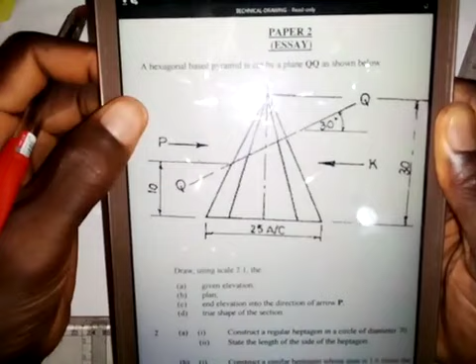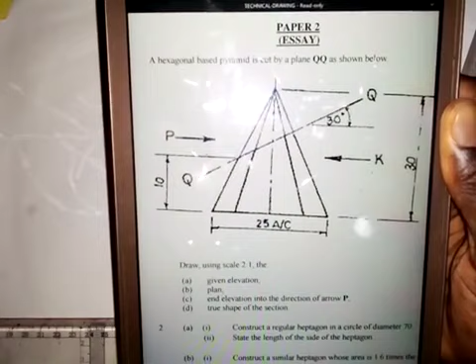And it's very important that you practice this subject because it's a practical subject. When you practice it, you become a master at it.

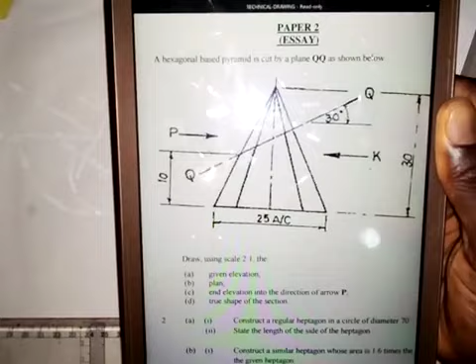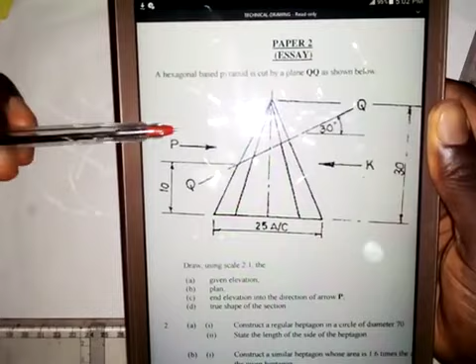I came across this question somewhere and I want to provide a solution to this question. Though I've seen something similar to this, I found that this question is a little bit different from what we have done before, in the sense that we are asked to draw using a scale of 2:1. So I'm going to explain that, but let's look at what the question says with this diagram and know what we have to do with it.

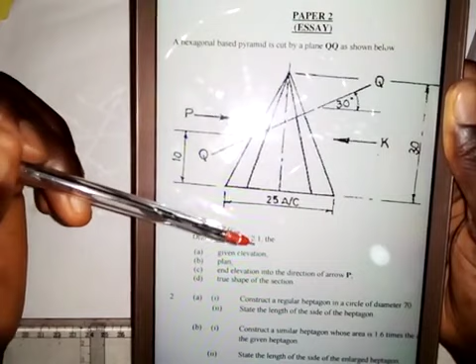As we have here, a hexagonal based pyramid is cut by a plane QQ as shown below. Draw using scale 2:1 the given elevation, the plan, the end elevation in direction of P, and the true shape of the section. So that is what we are asked to do. We have 4 questions, and I'm going to do everything in this same video.

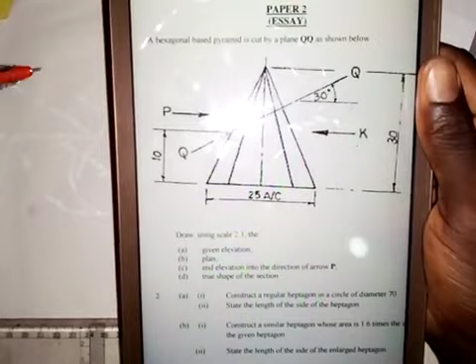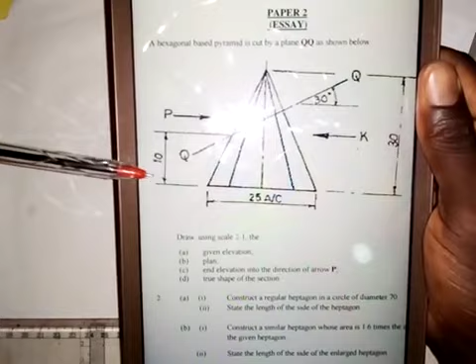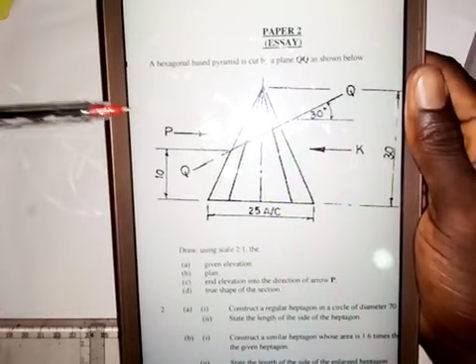Now, we're asked to use a scale of 2:1. The distance across corners here is 25 multiplied by 2, that's 50, and the distance from here to here is 10 multiplied by 2, that is 20, and the height of the pyramid is 30 multiplied by 2, that's 60, but the angle remains 30 degrees. You are not to multiply that by 2, so just leave it as 30 degrees as given in the question. So let's see the first thing that we have to do.

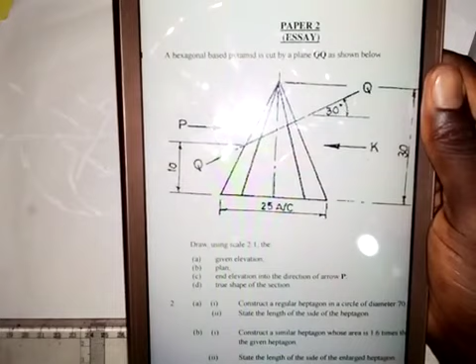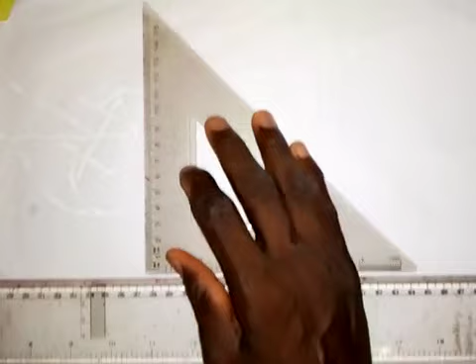We're asked to draw the given elevation, and then we have to draw the plan. So the first thing to do is to draw a vertical center line like this. Let me just extend it down a bit. All right, then we draw a horizontal center line like this.

If we multiply the distance across corners given to us, which is 25 millimeters, by 2, that will give us 50 millimeters. So we are still going to take a measurement of 25, because that distance across corners is for the diameter of the circle that we use to construct the hexagon. So the radius will be 25. We take a measurement of 25 millimeters and we draw a circle like this.

With that circle that we have drawn, we are going to put the pinpoint of the compass here. We draw an arc up here and down here, and then we put it at this point on the horizontal center line and make an arc here. So we have 6 points on this.

We are going to join these 2 points together like this. Then we join these 2 points together, and these 2 points together. So these points, we join them together. So here we have the hexagon.

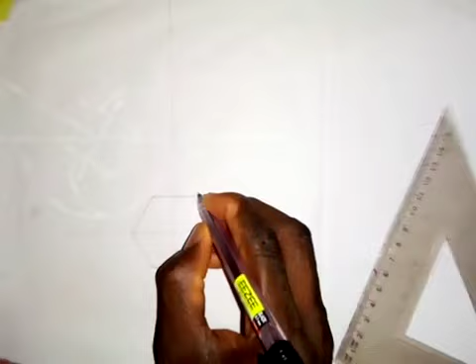Then we are going to number these points. This is point 1, this is point 2, this is point 3, this is point 4, this is point 5, this is point 6. So those are the 6 corners of the hexagon.

We are going to join these 2 points together. So 4 and 1 will be joined together like this, and then we also connect 3 and 6 together as we have connected 1 and 4 together. So we connect 3 and 6 together like this.

Okay, so having done that, the next thing that we are going to do is to draw the elevation as we are instructed in the question. So we move our T-square up and we draw a horizontal line like this. Then the next thing to do is to project this point.

So this point, I will take it up, that is point 2, and points 1 and 3 are the same point on the circumference of the circle. So we project it. Points 4 and 6 are the same point on the circumference of the circle. So we draw this, and then point 5. So we also draw a vertical line to meet the horizontal line.

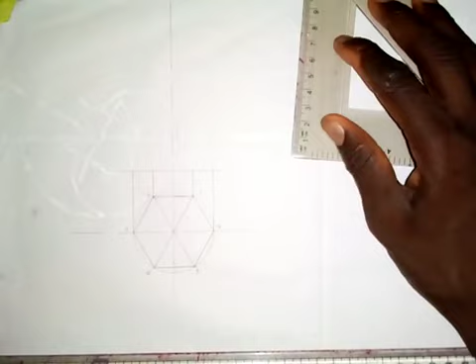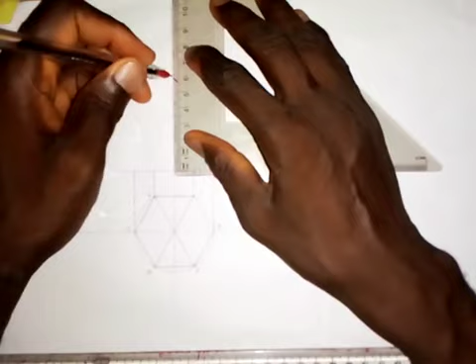Then we are going to take the measurement of the height of the pyramid. So as given in the question, it is 30 multiplied by 2, that is 60. So we take a measurement of 60 millimeters from this point on the vertical center line. So this is 60 millimeters.

I'm going to connect this point together with the apex of the pyramid. Also, I will connect this point together with the apex of the pyramid. Also, this point will be connected together with the apex of the pyramid, and then we connect this point together with the apex of the pyramid.

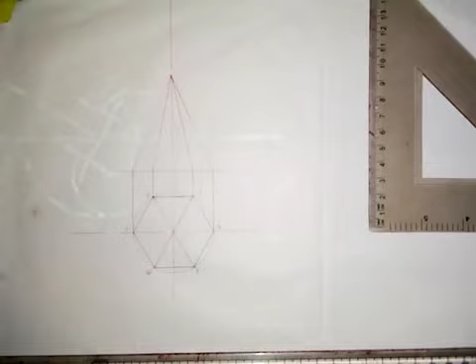Okay, so now, as we have in the question, the point at which the cutting plane touched this side is 10 millimeters. So if you multiply by 2, that is 20. So that 20 millimeters, we are taking it on the vertical center line. You can't take it on this side, it will not be accurate. So you take it on the vertical center line. So that is what I'm going to do.

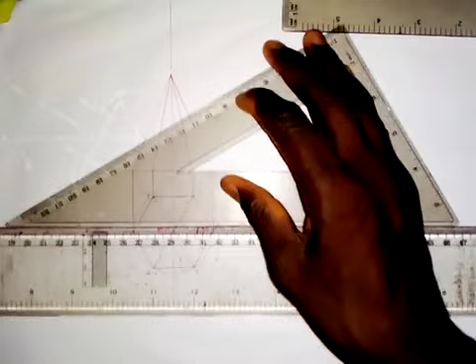So I will take a measurement of 20 millimeters here. This is 20. Then I will locate it. I'll just trace it to this slant side on the elevation. So this is the point. So the next thing to do is to take my 30-degree set square like this and set it at this point. Then I will draw the cutting plane QQ as given in the question. So this point is point Q, and this is also point Q here.

So the next thing to do is for us to make this a thick line. So this part has been cut off. So then you also make this a thick line. Next is you make this a thick line, and also we make this a thick line here. And then we are going to make the base thick.

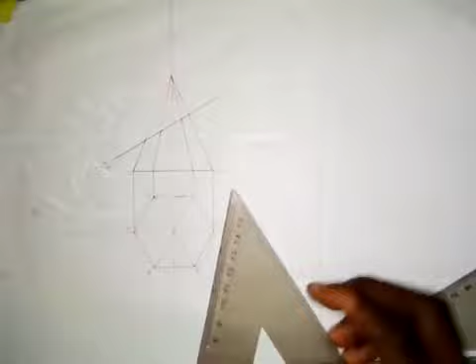Alright, so having done this, the next thing that we are going to do is to draw the complete plan. So this is the elevation now. As we are instructed, we have drawn the elevation. So the next thing to do is to draw the plan, because by the time we remove this part that is cut off, we are going to have a rough surface. That roughness has to be shown in the plan, and that's what I'm going to do.

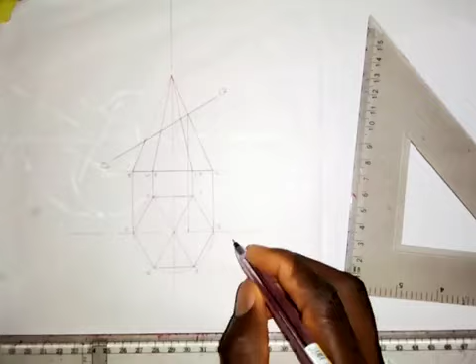So what you need to do now, from this point here, draw a vertical line. Okay, so if you look at this vertical line, this is 2, and this is 1, 3. Okay, so this is 4, 6, and this is point 5 on the pyramid. So this is line 2 here. This vertical line 2 meets this horizontal line 2 at this point.

Okay, then we also do the same thing from point 1. So we draw a vertical line like this. So this line contains 1 and 3. So this is point 3 here, and this is point 1 here. Okay, then we draw for 4 and 6. So we draw a vertical line down here. So this is point 4 here, and this is point 6.

So the last one is point 5. So if I draw a vertical line from here to meet this horizontal center line, this is point 5. So this point will be joined together. This point will be joined together.

So we join this point together with this. So we also join this point together with this. So we join this point together like this, and we also join this point together like this. Also, we join this point together.

So the next thing that we are going to do here is to hatch the surface, as we have a roughness on this part here. So we use our 45-degree set square to make hatching lines here on this surface, and that is what I'm doing right now. These lines should be equally spaced, drawn with thin continuous line. Okay. All right, so that is the complete plan.

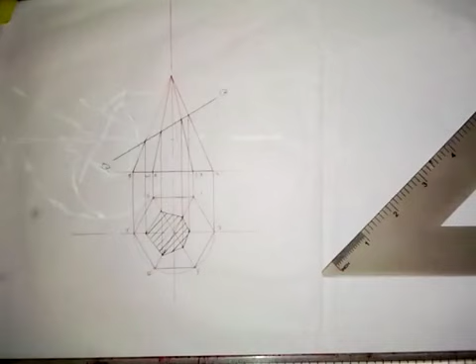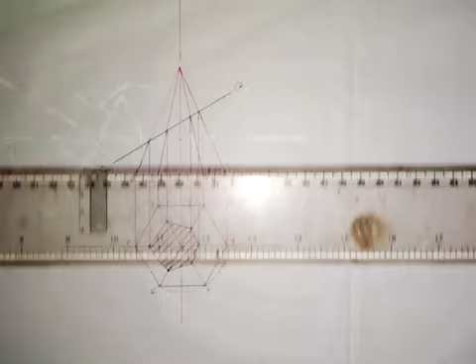All right, I've answered the first two questions. So I've drawn the given elevation and then I've drawn the plan. So next I'm going to draw the end elevation in direction of arrow P. Arrow P is in this direction. So if I'm to put it here, I'll just draw it like this. Okay, so ROP is in this direction as we have here. So this is arrow P here.

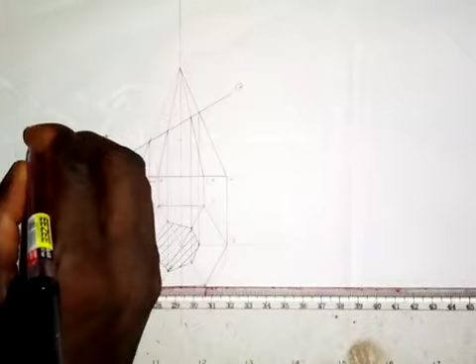So now, to draw that, I'm going to draw a horizontal line from this point like this to this side. Then I will also draw a horizontal line from this point like this. Coming up here, I will draw a horizontal line from this point, and then from this base of the pyramid, I will draw a horizontal line to this side. Next I'm going to take my 45 degree set square, set at this point 2 on the front elevation, then draw a line in this direction.

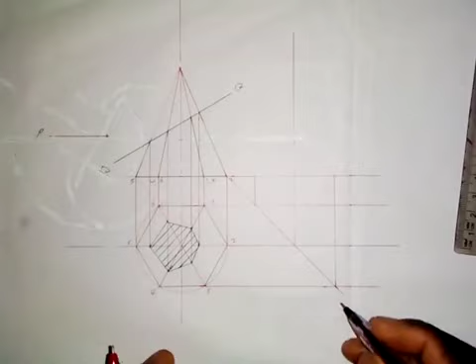Next, this center line, I'm going to produce it, so it goes up as we have the vertical center line here. Next I'm going to project this point, take it up to touch the horizontal line here, and also take this up to touch the horizontal line here. Okay, so this line contains 3 and 4. This line contains 2 and 5, while this line contains 1 and 6. Which means that if I go up here, I have points 3 and 4, this is point 2 and 5, and this is point 1 and 6 here.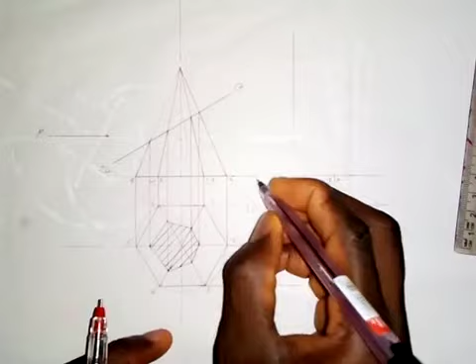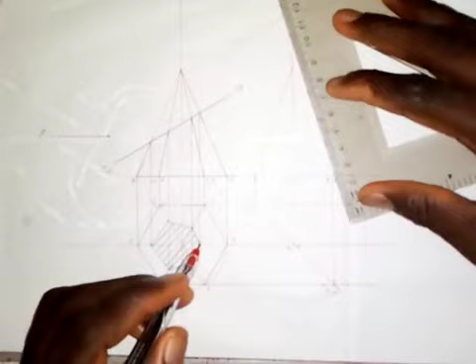So the next thing I'm going to do is to take the measurement of the height of the pyramid, which is 60 millimeters. I can also draw a horizontal line from the apex here, but I'll just take the measurement at 60 millimeters. So next I will join this point together with the apex like this, and then I will join this point together with the apex as we have here.

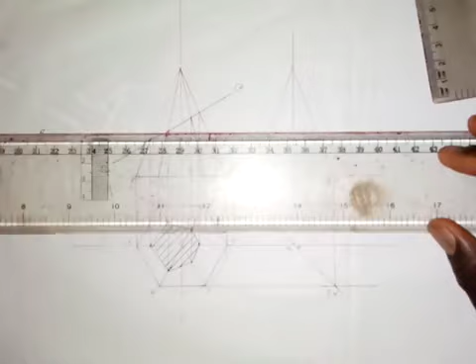Okay, so next I'm going to draw a horizontal line from this point 5 here. I will draw a horizontal line from this point. This point contains 4 and 6, and I will also draw a horizontal line from this point that contains 1 and 3 in the elevation, and I will draw a horizontal line from this point that contains 2.

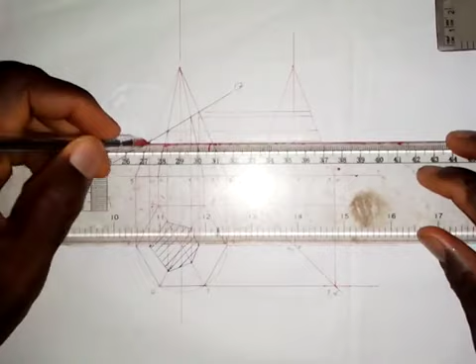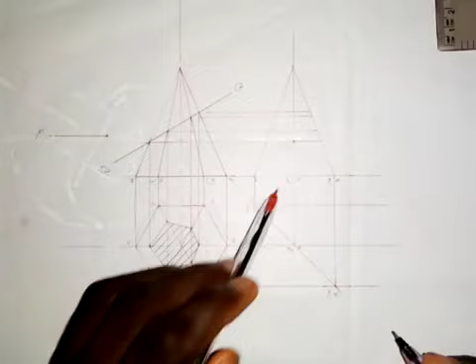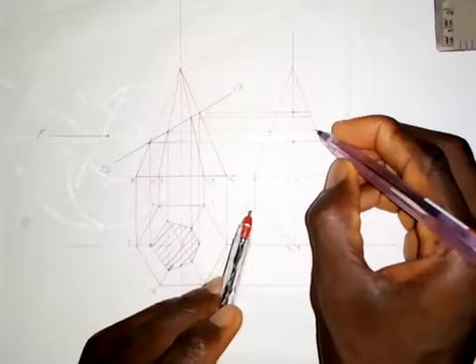So having drawn these horizontal lines, the next thing to do is to locate those points. Starting from here, this is horizontal line 5 from the front elevation, then vertical line 5, so this is point 5 here. Then we also have 2 on this line, so this point is point 2. Then here we have 4 and 6. This is where we are going to have 6, and here we have 4. So this is point 4.

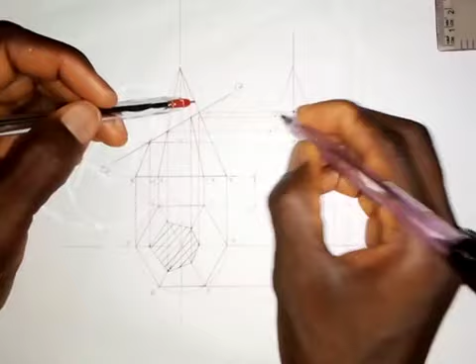The next point is point 1. This horizontal line contains 1 and 3. So this is point 1, and this is point 3 here. All right. So all I need to do is to join these points together to obtain the end elevation. I will join this together. This also, I'll join together. So this will be joined together.

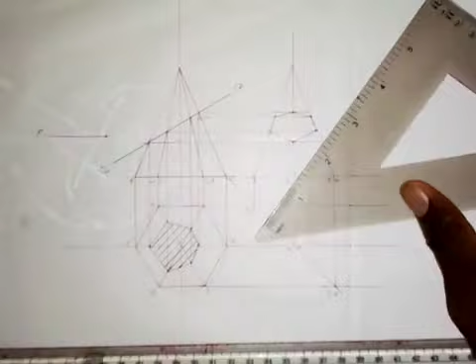Okay, so this will be joined together, and this will be joined together. All right, so the next thing to do, I need to make this line a thick line from here to here. I will also make this line a thick line from here to here. So this line also, I will make it a thick line, and this line is also a thick line like this.

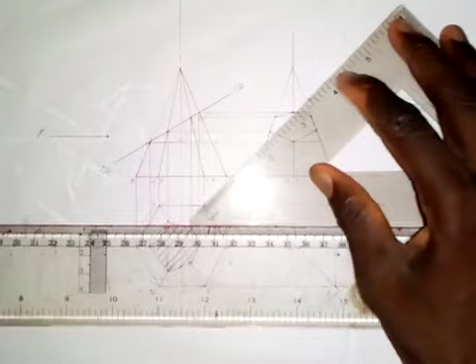Okay, then I'm going to hatch the surface. So as we have here, making hatching lines on this surface like this. Okay, so this is the third question that we are answering. We have one more question left, which says that we should draw the true shape of the cut surface. So now we go for that. So this is the end elevation. This is how it will look. To go for the true shape of the cut surface,

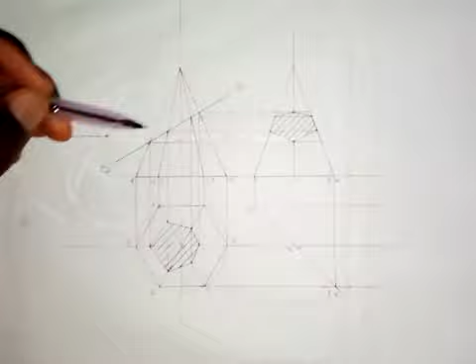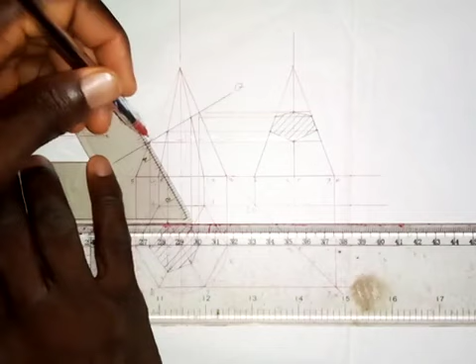and it's very important, what we are going to do is to draw a line that is perpendicular to each of these points on this part here. So this cutting plane is drawn with the 30-degree side of our set square, and to draw a line that is perpendicular to each of these points, I have to make use of the 60-degree side of my set square, because 30 plus 60 will give us 90. So if I set my set square like this, I will draw a line. So this line is perpendicular to that point on the cut surface. So also I will draw from this point, and then I will also draw from this point.

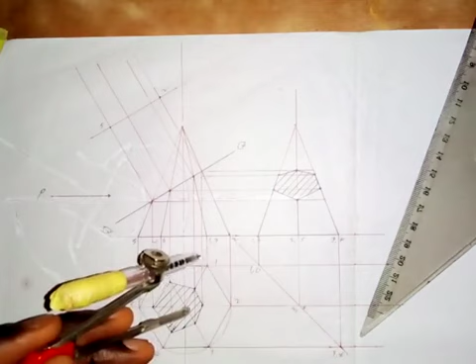All right, so the next thing I'm going to do is to draw a perpendicular line to these lines here. So this is it. All right, so now with what I've done here, this point, if I follow this point, this is point 2. So this is point 2, and this point here, if I follow this line, this is point 5. So I need to locate the other points, and to do that, I will just take my compass. So this line contains 1 and 3. So I'll just put it in the midpoint. This midpoint that is on the horizontal center line is in between 1 and 3.

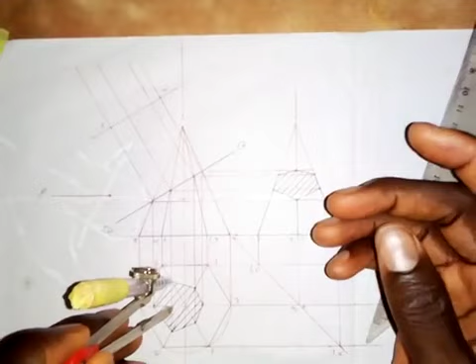So I just put the pinpoint of my compass here, take this distance. I need to reduce this a bit. Okay, so I'll take this distance, from here to here. Then I will follow this line. It contains 1 and 3, so I put it at the midpoint here, and then I'll make an arc at this point, and also I'll make an arc at this point. So the next is for 4 and 6, so in the middle on the horizontal center line, I'll just extend it to 6, and I can also extend it to 4, any one that I like. So this line contains 4 and 6. I will put it here, and I make an arc here. Also, I make an arc here.

All right, so having done this, the next thing to do is to join these points together. So this is point 3, while this point is point 1. So this is point 4, while this point is point 6 here. So I will join these together. Join 3 and 4 together. We join 2 and 3 together like this. So 1 and 2 together like this, and then 1 and 6 together. Okay, so 6 and 5 together. Then I will join 4 and 5 together.

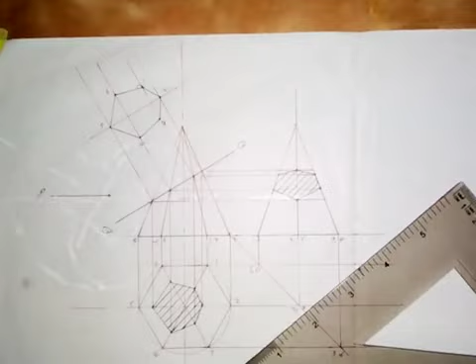All right, so now we need to hatch this surface. So with our 45-degree set square, we produce hatching lines here. All right, so that is the true shape as we are instructed. It's as simple as I've done it here.